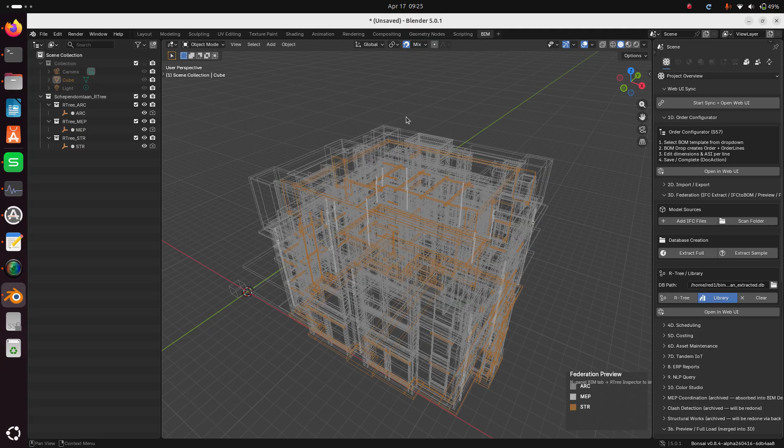Let me show you with an interesting building. How about this? It calls up within a second. These are the bounding boxes which we extracted from the IFC into a database, and you pull this library in a few seconds. It will render all the meshes, and if I clear the bounding boxes, it is done very nicely.

It's a very small drawing, and you can do all the scheduling you want and so forth. I've shown in, let's see how to schedule this to build.

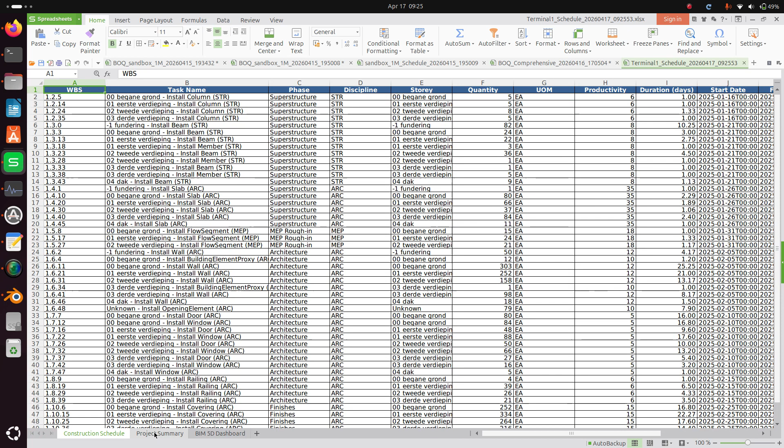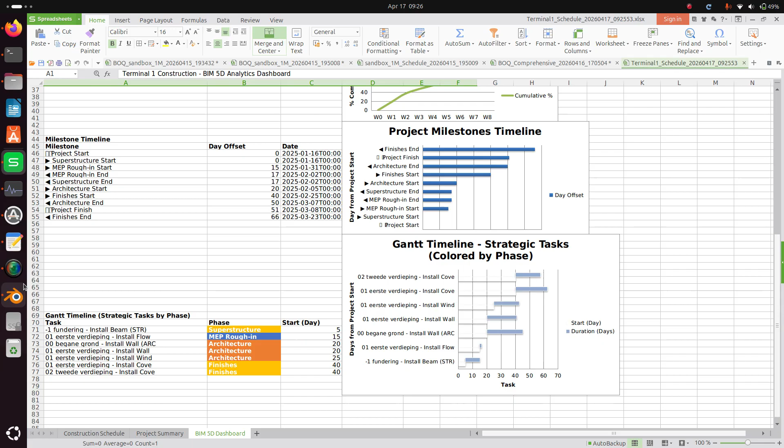Right, it'll give you a breakdown of the extract, and even if you want to build it, I will demonstrate to you. You can do it with a very large building. It even has the 5D all the way to 7D. You see here with an executive summary.

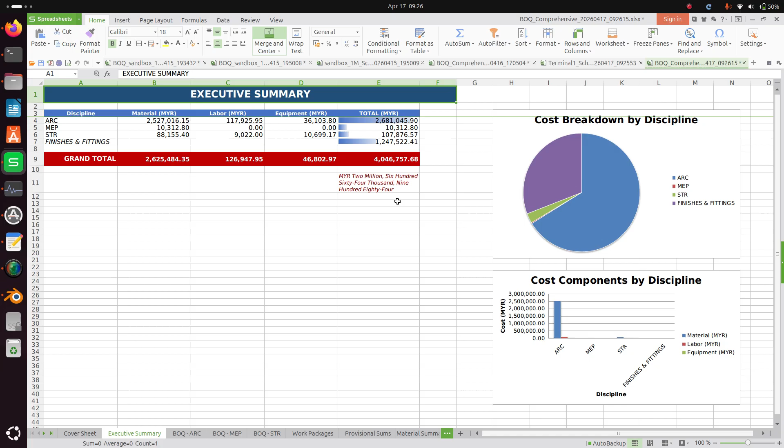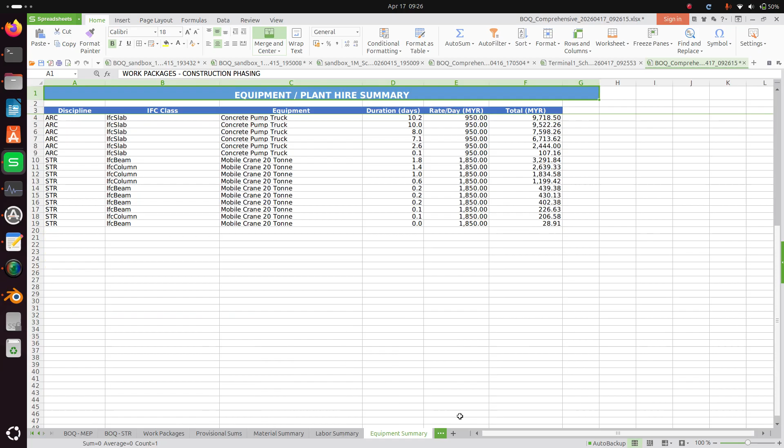There's a mistake here, it's too expensive. Oh, I don't know what kind of building it is, but you can have many things, even up to the equipment summary, a crane. So anyway, I'll give you the check.

Now I'm going to show you a 1 million element stress test. This will be really cool, and this is achievable because we are running on a database, and secondly we are doing it with the R-Tree. It will take about 13 seconds for 1 million elements, which only pulls out the bounding boxes.

And because it's a queryable database, it's so scalable now, the IFC content, that we can now do amazing things with it. So I'll call up the R-Tree panel, another way to render things. Let me show you something that's easy to set up.

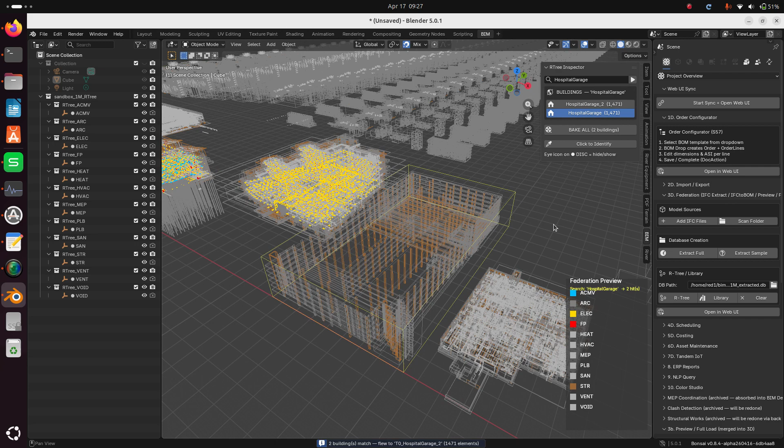How about the hospital garage? It's here. I'll show you something very interesting. You can go and drill into all the elements, or you can start baking them now. Here's baking them, it's only part of it.

Let me pull up, yes, 824. So you can keep on pressing and it will take shape. Or you can put it overnight. It will just take shape just like that.

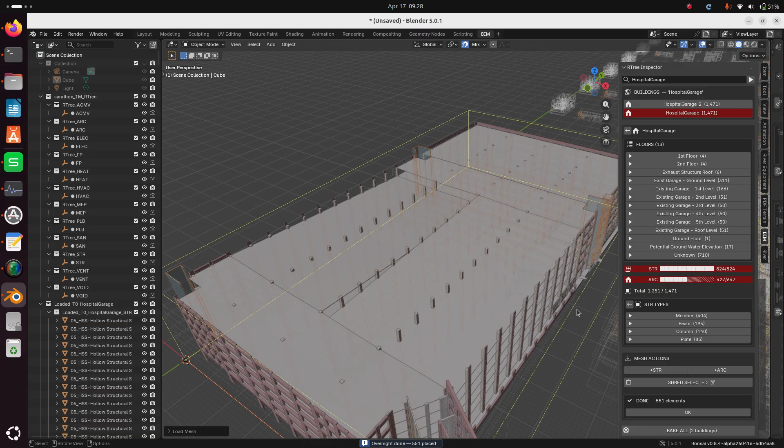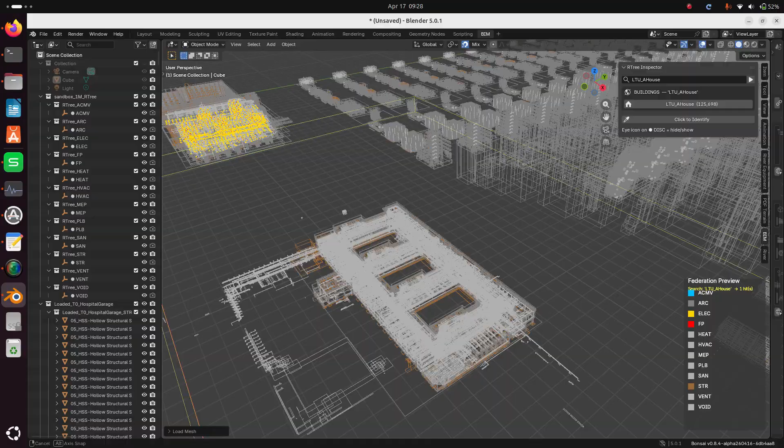Okay, let's get to another building. Let's look at a large one. Okay, this very large piece is the largest, 126,000 elements. You can crash any Bonsai. You see how smooth it is here, because it's only bounding boxes.

Let me get nearer. Okay, but the magic of our R-Tree panel is that we sort of break down dynamically all the layers.

So you can go to story 1, and you can look at plate, beam, or this is a flow segment, it's a vent, and immediately you can see it built. You can shred it, right? You can go to another segment and see what it is.

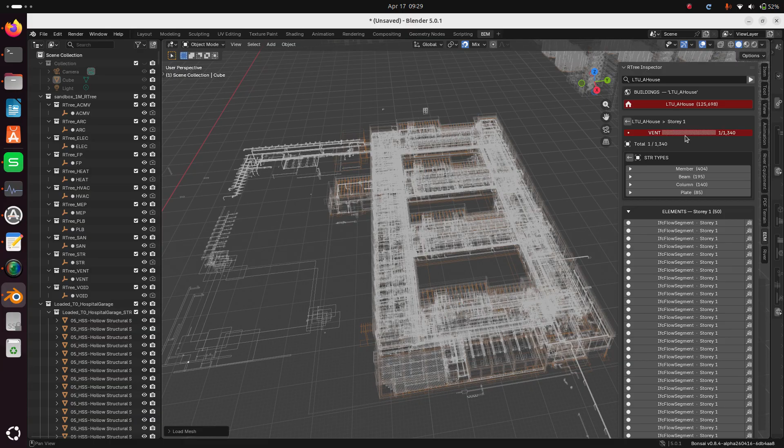Okay, and in the scheme of things, here you are. So now the magic will be, let me get back to the house level. It keeps on resizing, it's alright, I'll fix that, not to resize so much.

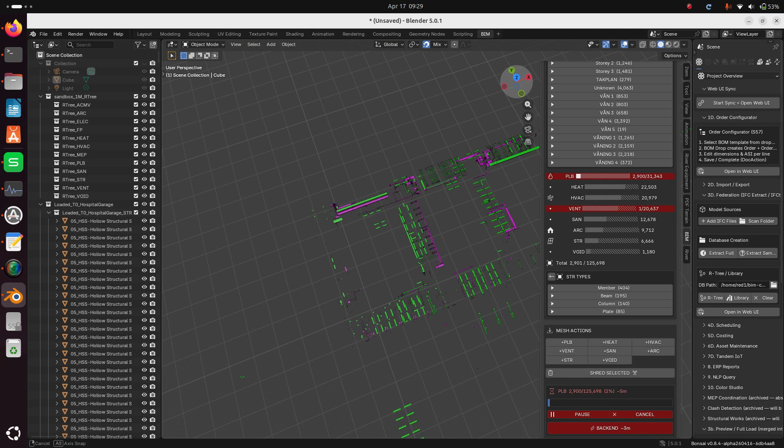But what I want to show you here is that you can turn on the overnight, and it's actually building. I'll just clear it. You can see that, but it is not responsive, you can see it's a bit sluggish because it's running on the same instance.

So I solved that by sending this to the backend. You can see you run into the hours, so the backend is actually 3 minutes divided by 4 because I have 4 CPUs here. Here it is, and it's finished, completely finished. So hold up, but let me quickly get back before you see anything.

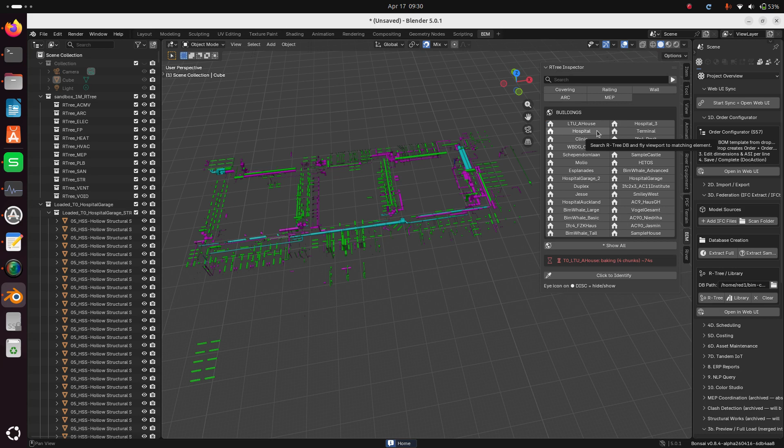Let's do a hospital. Alright, we have a hospital, and it's over here. We should see the R-Tree, but never mind, we will just do an overnight or so. You see it begin to take shape here. You can see that the hospital is taking shape.

The R-Tree is the bounding box for you to have a sense of everything, and you do all the calculation of clash, which we don't need now because I have a compiler inside. You can look up my documentation, I have everything here, so you can look it up.

I know this is the killer, 2D, so I'm doing that too. 2D to 3D, 3D, and BIM 5D. Okay, let's get back to this.

It's still moving, the backend. It's already baked, the LTU house, and this is rather slow. So if I send it to the backend also, here, should I send it to the backend? It's rather slow, it's going to take a long time. Or should I launch another building?

Let me send it to the backend. So this one will be in the backend. This will take a matter of seconds. Let me quickly show something else, and then we'll show how they merge back.

Oops, I went to the same building, which I do not want. Let me get back. I took a wrong turn. We are playing with 1 million. Oh no, I keep going to the wrong building. I must get an escape.

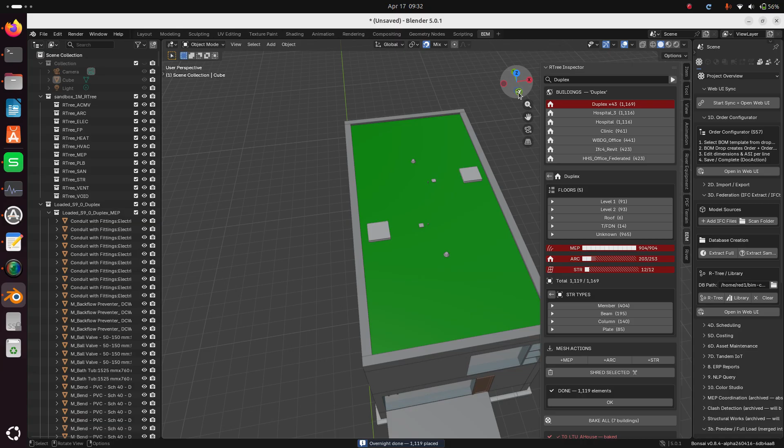Here is the duplex. I'm not calling it R-Tree because you'd have to look back for it, so just call this duplex. I'll do the overnight fetch, so here you are. This is the duplex taking shape very quickly, maybe because the R-Tree is not there.

How about another one? How about this office? Let's do it as an office. A lot of research goes into this. Once you get to the architecture, you will see it taking shape.

5,000. So this type of meshing uses the cache memory and something on geometry nodes, but it's kind of tricky. You can see it in the technical notes, if you want, I can show it. So we have 2 things baked. When we save and re-preview all that we have done here, together with what is done in the background, it will be relinked. Let's let this finish first.

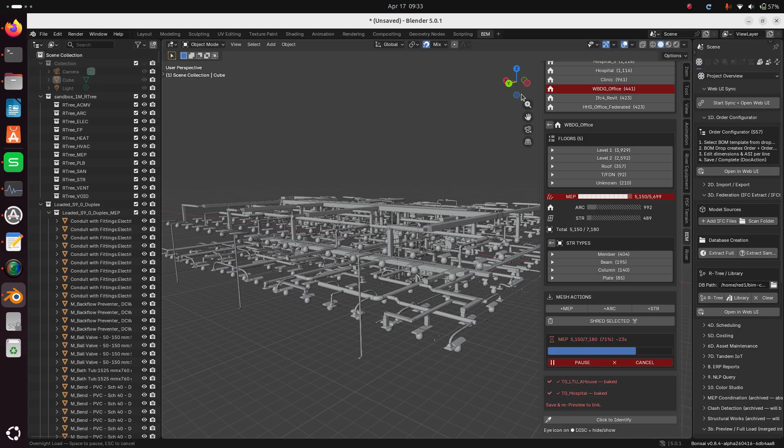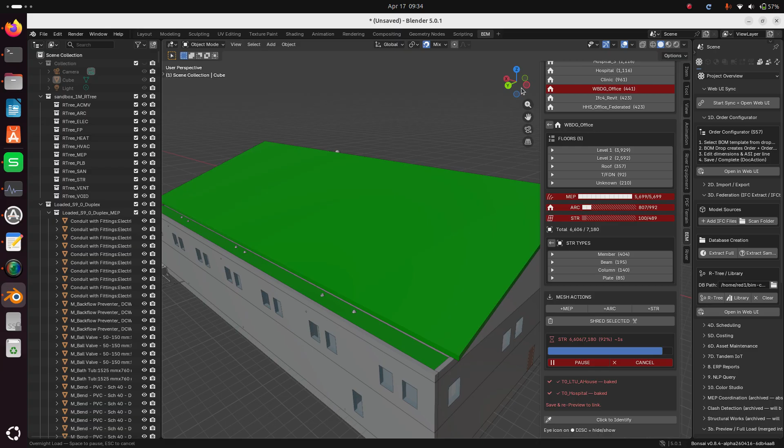You can see it is holding up because it is in the same session, whereas this one is sent to the backend with 4 servers or 4 instances. So even for 1 million, the redo will be rather quick too. See, now it's fed back.

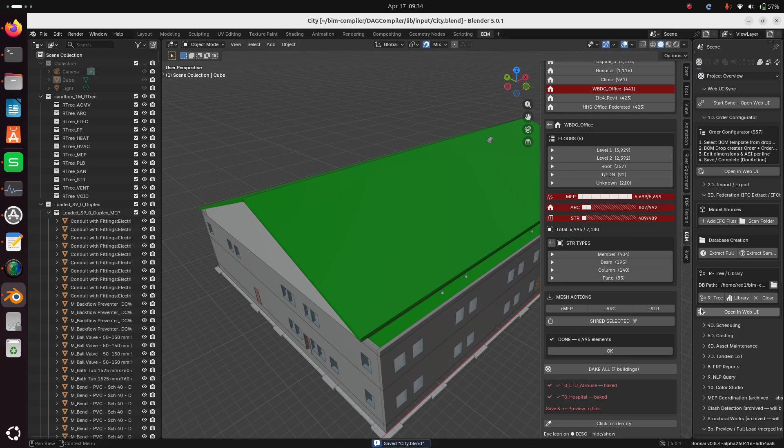So now I will save. I'll give it, save it as City.blend. It's not very small. So we save, and then we'll do the... let me pull it out.

There are 2 buildings, the hospital and the LTU. Okay, you freeze, of course. You do the swap. It'll take 40 seconds, quite some time before it starts showing up here. So it's already showing up, but it's linking back into this render that's taking shape. I'll pause for a while and come back and tell you how long it takes.

So when you switch off the clear in a second, you'll see the buildings there, which proves that they work. So here we are, if we draw near and bring them up, you could just basically see them by selecting.

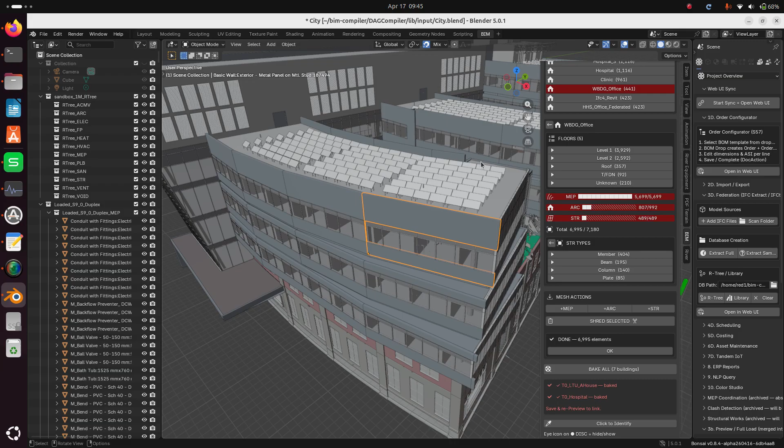We can basically view easier now, the work done. So this is the hospital that was rendered in the backend very quickly with the times shown earlier. Okay, so where's the hospital? Let me see.

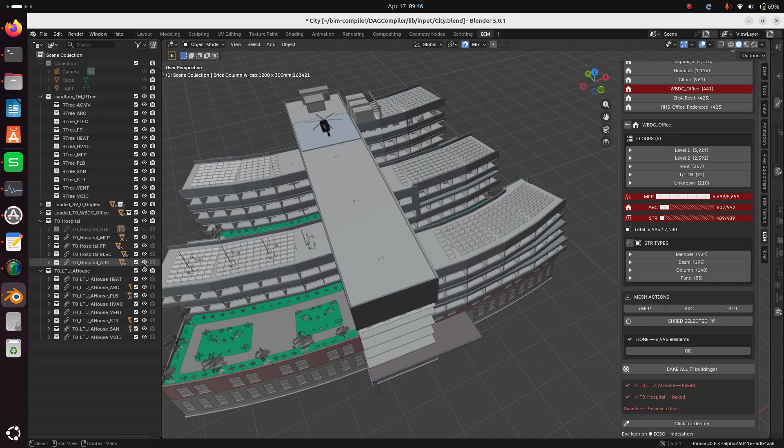Okay, this is the other building. Here's the hospital. So you're supposed to get all the elements, right? You can still get them highlighted, you can go to them. You can also then apply all the IFC goodwill. Let me get to architecture. So you can have that. Let us get to the...

...LTU house, the largest, which is the 120,000. Oops, so can we get out? Here it is, also done. So here's the idea of the add-on and this panel.

Tell me how I can further improve and how it can help your work. I have the 3, 4, 5D as I shown earlier. Here it is, all this downstream up to maintenance, which is very important when you hand over in Tandem. I sort of emulate all that. I'm not a BIM expert, I'm just a Java ERP programmer. It was some BIM friends who told me about this, so I still need continuous guidance from the community on what to do.